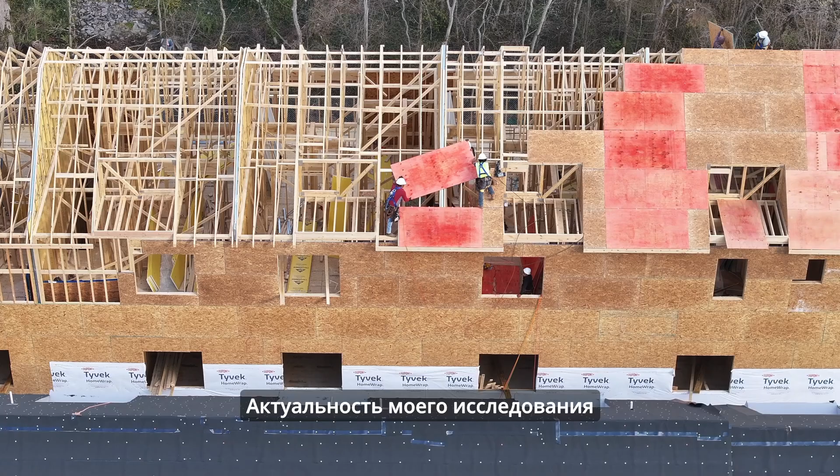My research conducted in the VEGERA framework examines the use of renewable raw materials in housing construction, and the research compares a model house in Tashkent to a conventionally built house in the region. The goal is to assess how these materials can reduce the carbon footprint in buildings. And the relevance of my research is to answer the question if sustainable construction is crucial to mitigate climate change.

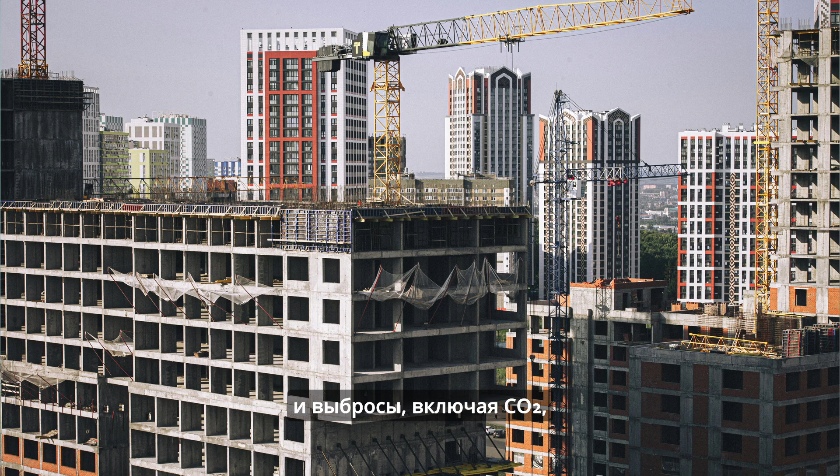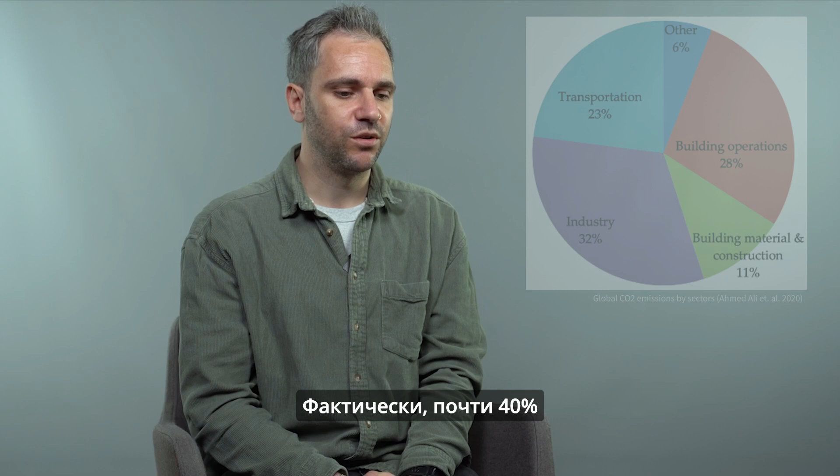The building sector in general significantly impacts the environment, mainly through energy consumption and emissions including CO2, particulate matter, sulfur dioxide and carbon monoxide. In fact, nearly 40% of global CO2 emissions are related to buildings, which shows why it is so important to use more sustainable building materials and renewable energy in the housing sector.

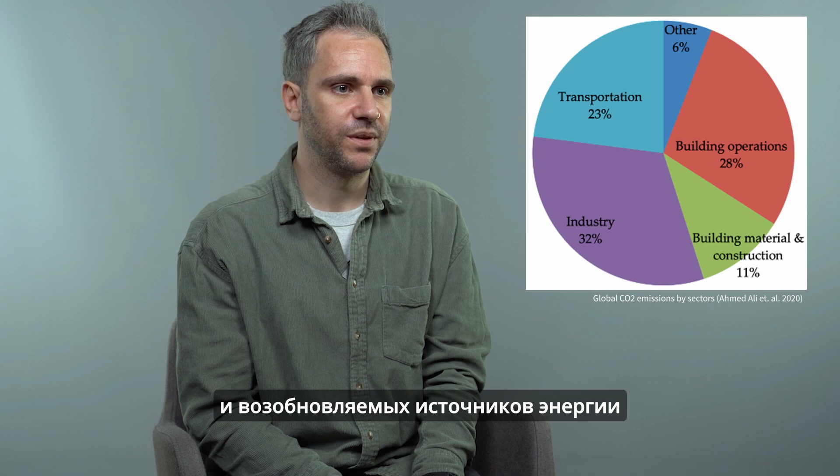These general environmental effects can also be transferred to Central Asia and Uzbekistan, because in Uzbekistan, buildings are responsible for more than half of the total energy consumption, which is about 70 million tons of oil equivalents per year, which is a lot even compared to Western standards and European countries.

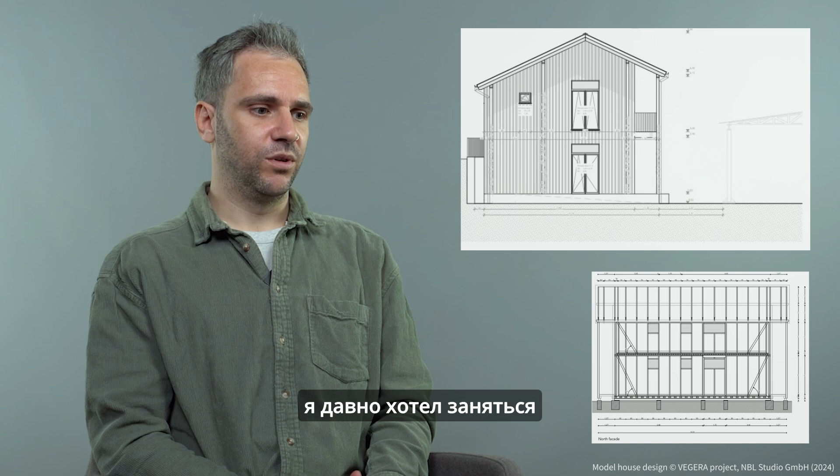I conducted my research in the frame of the VEGERA project, and from the beginning I was very interested in this project because for me it was a chance to write a master thesis which has some impact and really fitted into my interests, especially because I wanted to do a life cycle assessment for a longer time, and this was the perfect chance to dive into it and learn more about it.

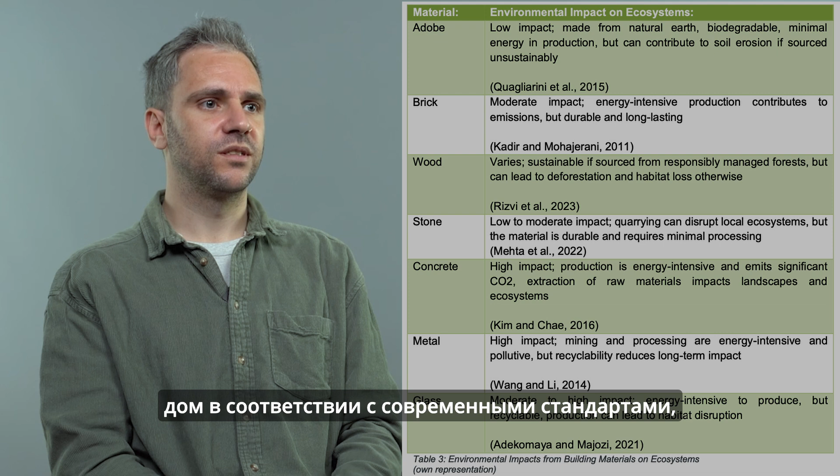So the hypothesis behind choosing these building materials was that it results in a lower environmental impact overall, that these materials can be sourced locally, and that they also have further advantages, like they provide a nice room climate, and they have been used in traditional Uzbek architecture for centuries. And the VEGERA project tried to build a house according to modern standards, but with traditional building materials.

There are different challenges when conducting a life cycle assessment in regions like Tashkent, but it's not only about the region, it's also about the building style, because for a lot of classic building materials like sand, stone, burnt brick or concrete, there are a lot of reference numbers and DIN norms, so it's very easy to provide the necessary data for the software, in this case CAALA.

So it's quite easy to calculate everything, but for specific kinds of timber there is no data, and there is also no data for this quite complicated building technique, because, for example, the walls and the roof have a lot of layers and even air layers. So you need a lot of data to calculate the U value of a specific component of the house, and you don't have the necessary data sources. So you have to calculate a lot of data or search for data sources manually, and this is the huge challenge.

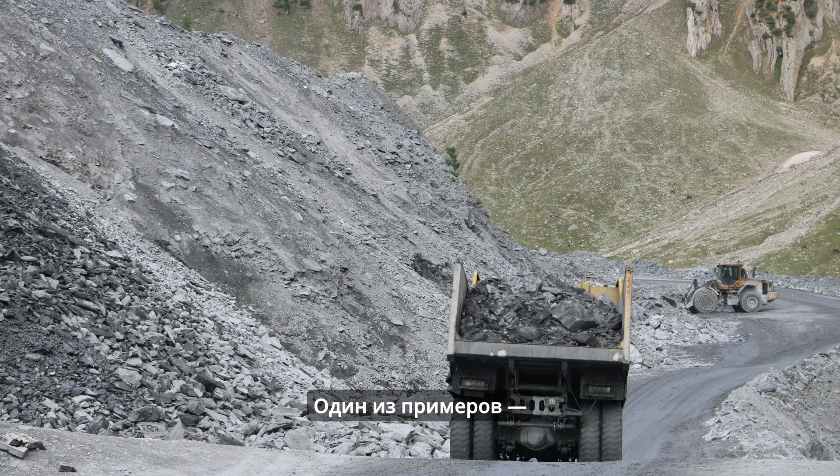And then most of the softwares focus on regions like Europe or the US, and they work with certain values, for example in the transport or in the recycling stage, and it is not given that the same values and numbers can be applied to Uzbekistan or Tashkent. One example is that you can't choose the weather reference for the region Tashkent. For example, I calculated everything with the weather reference of Potsdam, because the CAALA software is from a German software provider.

Natural resources like wood can help to reduce carbon emissions because in their growth phase they store a lot of CO2, and if you cut the trees and use the timber or wood for long-lasting projects like houses, the CO2 is stored for a long time in these structures. So theoretically, if you build a lot of infrastructure and houses out of renewable materials like wood, you create a carbon sink. This is also where the idea of bio-based architecture or CO2 neutral cities comes from.

If you also want to talk about the disadvantages of building with wood at this point, then it's also important to mention that the use of trees or timber can also be problematic, since cutting down forests leads to a significant loss of biodiversity and natural carbon sinks.

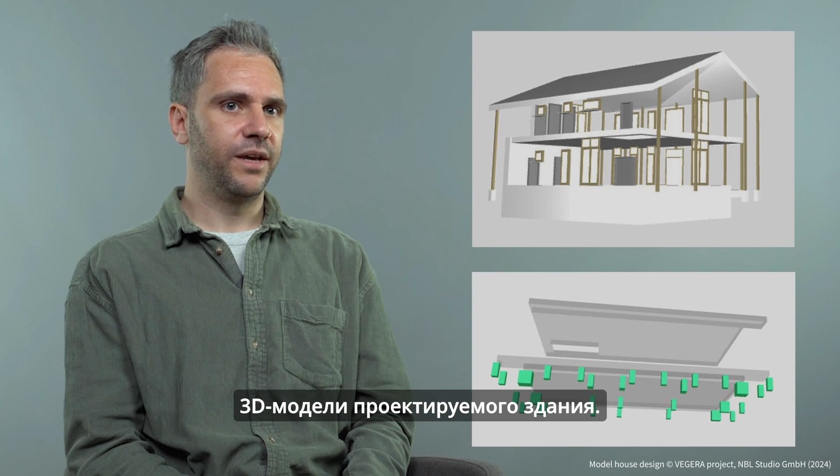In the second step, you give the program all the information about the building materials used for each component, and then CAALA will calculate the whole life cycle of the building. And you can also give information like which heating system or which cooling systems are planned. And the huge advantage is that you can, for example, replace certain materials in the planning phase, and then you can take a look how this changes the overall environmental impact.

And Ubakus is an online software which is free, which helps you to calculate U values. And U values are really important when you calculate the energy needs of a certain building, because the U value gives the information about the heat transmission losses. So basically how much heat can pass through a certain component of the building, which is really important to reduce the energy demand in the long run, like when you live in the house.

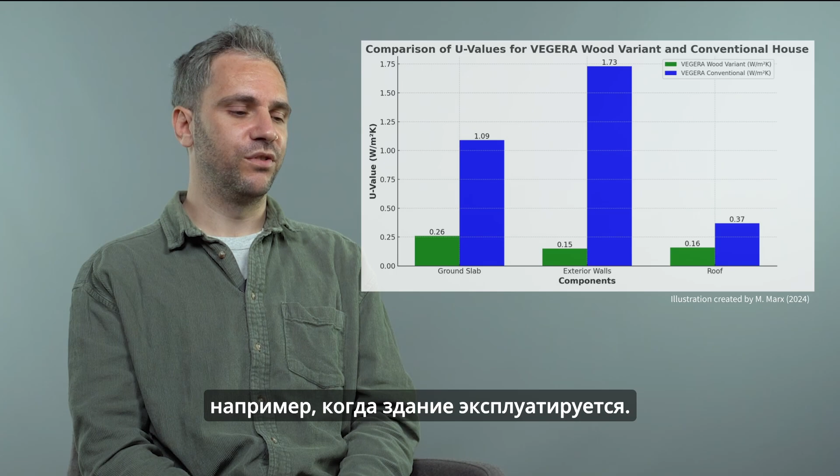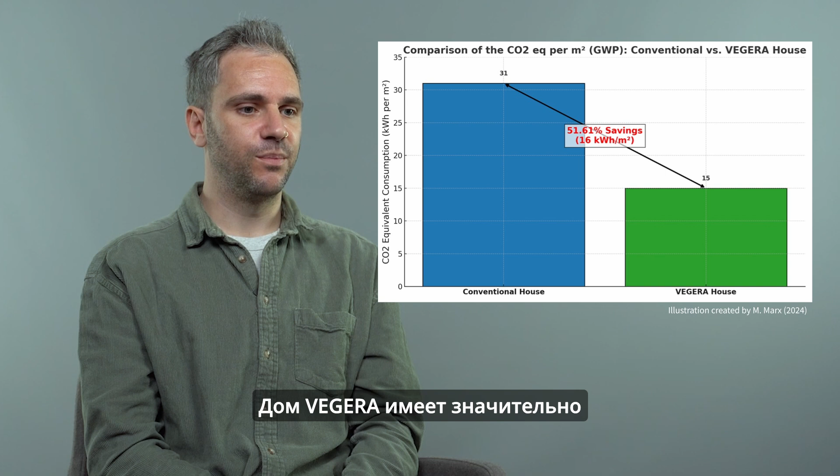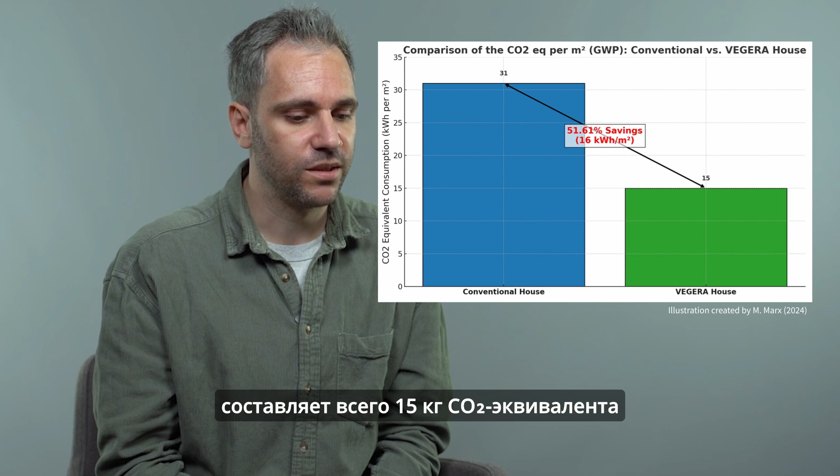My results showed that the project proposal was right, so the VEGERA house has a much smaller environmental impact. In numbers, that means that the conventional house has a global warming potential, GWP, of 31 kilograms CO2 equivalents per square meter, and the VEGERA house has a GWP of just 15 kilograms CO2 equivalent per square meter, which is a saving of more than 50% per square meter.

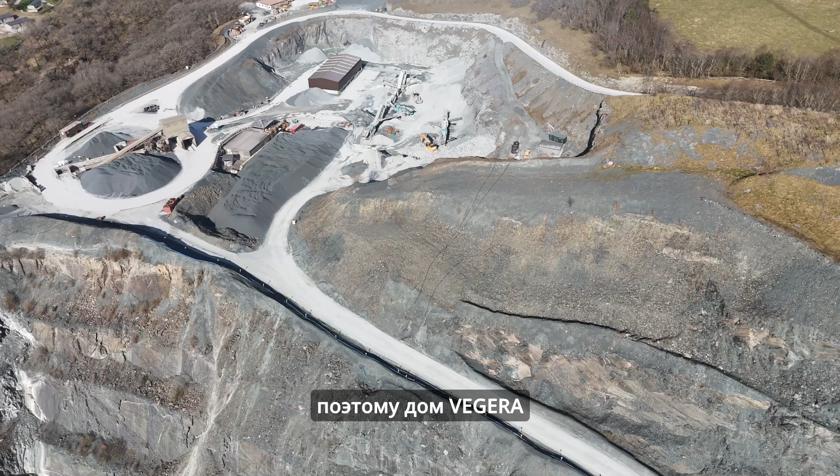There are different aspects where the most CO2 is saved. So one big reason is, of course, that completely different materials are used. As mentioned before, timber has the ability to save CO2. So the VEGERA house turns into a carbon sink basically. This is of course one huge difference, because a classic house is built out of materials like concrete and bricks, and especially concrete is super CO2 intensive.

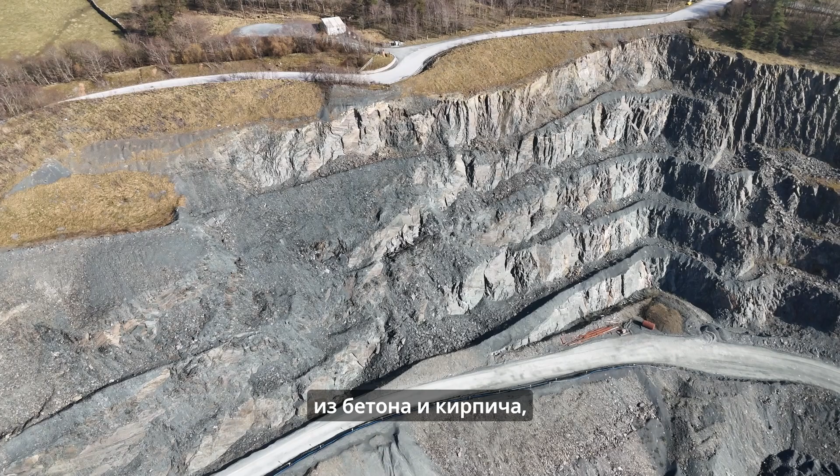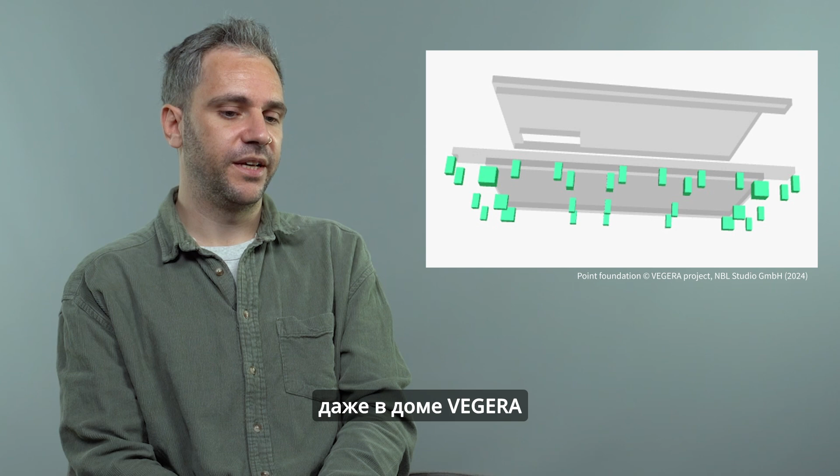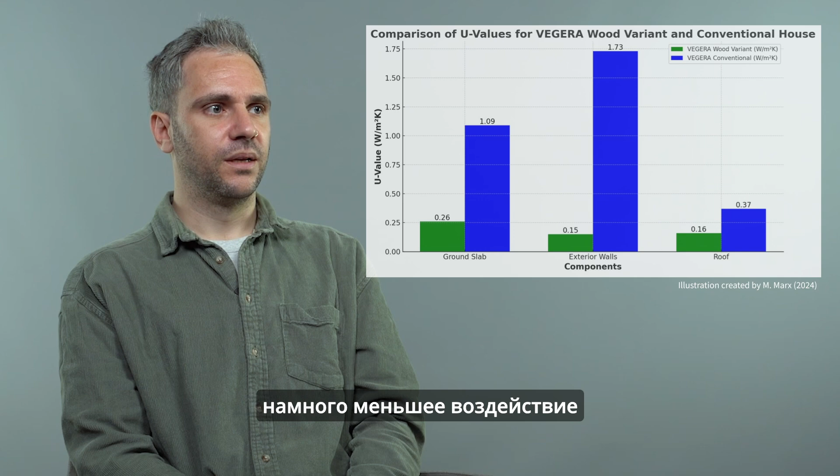And then another huge difference is that even the VEGERA house uses concrete for the point foundations, because Tashkent is an earthquake area. You can't build a house there without a solid concrete foundation. But the classic house has a complete strip foundation, which is in total a lot more mass of concrete. So the smart building technique of using a point foundation saves a lot of concrete and therefore CO2, and the house has a far lower environmental impact.

In the next decades, a lot of new houses will be built, and therefore new building regulations like introducing sustainable building styles in Uzbekistan offer a huge chance to make individual housing more sustainable. And projects like VEGERA show that using renewable materials and smart building techniques make a huge difference in the long run. And it is also more attractive because the house needs far less energy when you live in it, since the insulation is much better, and this results in lower living costs, which makes it highly attractive for people to live in these kinds of buildings.

The VEGERA house has superior insulation properties compared to a conventionally built house with the same VEGERA geometry. Every component has lower U values than the conventional house, which leads to significantly lower transmission heat losses, which again results in drastically reduced annual heating energy requirements. And in numbers, this is a reduction of 84% of energy consumption per square meter compared to the conventionally built house.